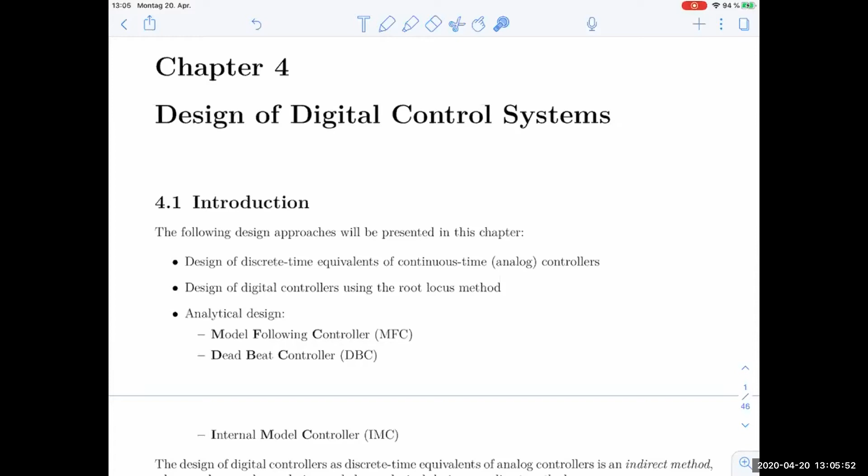Let's go into the root locus method once again. As a short reminder, the first task we have to do is basically look at our control system and decide on a sampling frequency.

We can do that by looking at, on one hand, Shannon. The Shannon principle, or the Shannon theorem, tells us that whenever we have some highest frequencies active in our system, in our signals, we choose our sampling time less than half times one over this frequency that occurs in the system or signal somewhere, which is a too weak bound usually.

We should definitely sample faster, because usually we do not have the idealistic framework of Shannon valid. When you look at typical responses, you see up here a non-oscillatory response like this one, or a typical oscillatory response. You can identify time constants, as you know, from PT1 behavior, or in PT2 behavior, the period length of a damped oscillation here.

The rule of thumb that is usually successful is to select the sampling time an order of magnitude faster than that. If you have several of those effects in the system, you have to decide on some trade-off, but you have to resolve the relevant time constants finely enough, with several samples at least. Usually we have 8 or 10 samples, which we consider sufficient.

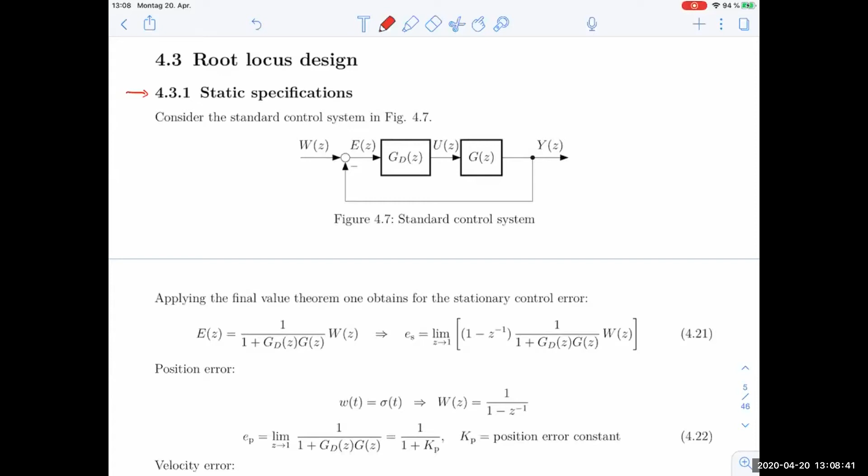Basically, static specifications are, for example, the position error and the velocity error. Here are the formulations for the discrete time control system. You see this control system up here in figure 4.7. So we have a controller in series connection with the plant in its Z domain representation, and a unit feedback, a negative feedback, where W is the reference, E is the control error, and Y is the output, and in between here we have the control input U, the manipulated variable.

The position error is defined as basically the value of the control error E, after we step up in the reference for long times, so for the limit Z towards 1, respectively for the time index towards infinity. So we look at the steady state response when we go in with a step, that's the step representation in the Z domain, and then we just evaluate this limit. The position error is just 1 over 1 plus Kp, and Kp is this stationary gain essentially for the loop gain, Gd times G.

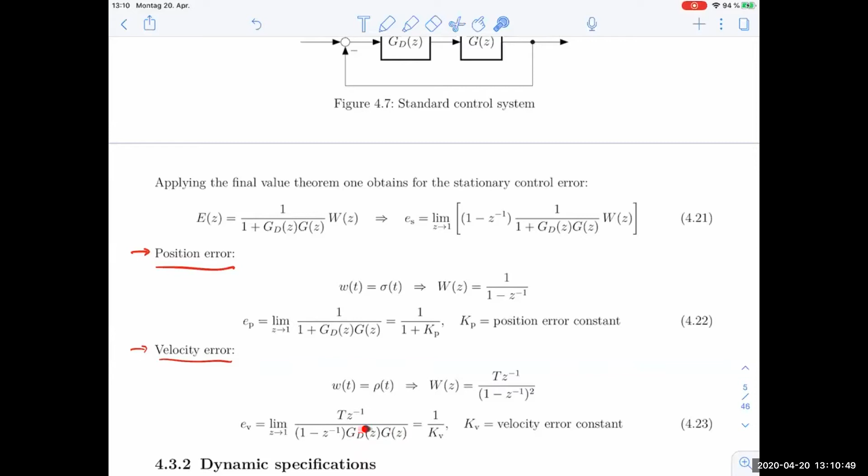We call this Kv, the velocity error constant. And if you have specifications in the position or velocity errors, then you have some idea now how the loop gain should behave in its stationary limit.

That's why we come up with these static specifications. For dynamic specifications, that's what we typically mean when we speak about some rise time, a certain time that the system reacts and is being pulled up to the reference or target value. Then there is some settling process occurring.

Usually you have some overshoot, which we call EM, as a ratio of the maximum amplitude divided by the final amplitude, minus 1. And then you have the time at which this maximum occurs.

Then you have a settling time, after which all the transients have died out sufficiently well so that the output variable is within plus minus some delta bound of the final value. This is typically 2%, plus minus 5%, or whatever you want to use.

These dynamic specifications are basically real world numbers that you can come up with. By that, you can specify how fast the system should follow a reference step or should adjust its behavior once a disturbance hits.

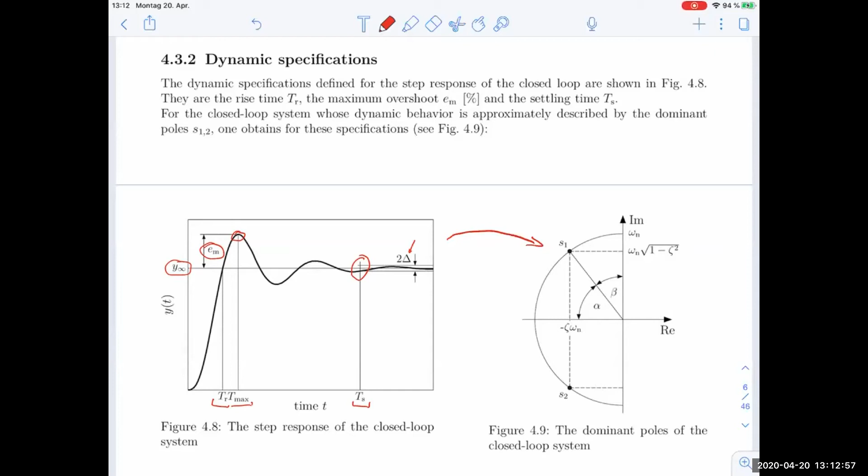If we have these numbers, we can translate them into our well-known S domain and into a pole pair location of a dominant pole pair. So here the dominant pole pair idea comes in, because in the PT2 case we've drawn down these numbers, we have simple formulas.

If we have a second order system which dominates the response, if we have two poles that dominate, and there might be some other higher order dynamics, but they should not be important, then we can approximately treat our system as a PT2 system and specify two complex conjugate poles in S, and of course in the Z domain afterwards.

We just transform them to the locations in the Z domain afterwards. But the step is usually: first you translate these real world specifications in a dynamic setting to the S domain pole locations, and then to the Z domain.

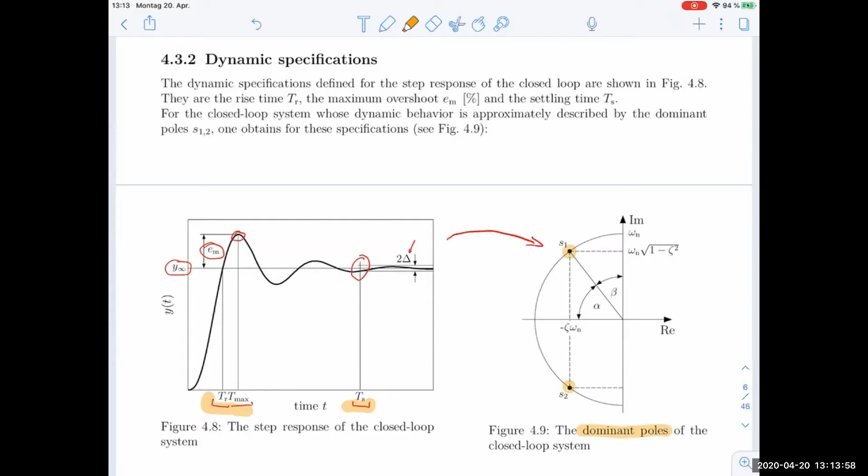So that's how we come up with the specifications to set up our control design if, for example, we want to use the root locus method. We have some formulas collected here for the rise time and the overshoot and so on, and in the collection formula, that's also included, of course.

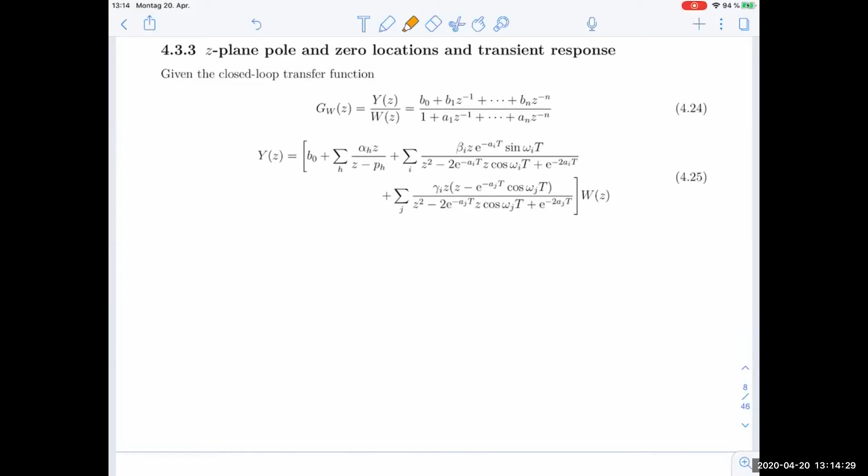Last time we spoke about first and second order system responses. When we look at the Z domain first and second order responses, what we can see is for the first order response, that's basically systems that look like C over Z minus P, which is basically a PT1 behavior.

If we look at its pulse response, the weighting sequence, we can see that depending on where the pole location is, if it's inside the unit circle, then we will get the typical response we are used to, just sampled. For an asymptotically stable PT1, we will have a decaying pulse response, a decaying weighting sequence.

The boundary case, the marginal case, is when this pole tends toward the integrator location at Z equals 1. Then the pulse response is just basically the step: we hit the system with a pulse, and the output jumps up to 1 and stays there. That's marginally stable — it doesn't blow up, but it doesn't decay to 0 either.

The next qualitative case would be to shift this pole outside of the unit circle, and then we have our exponential blow up, going to infinity.

But then we've seen the interesting effect that when we realize a system with the pole on the other side, with a negative real part in the Z plane, we have a very interesting behavior — we call that the ringing behavior, where we essentially have a change of sign in each and every sample.

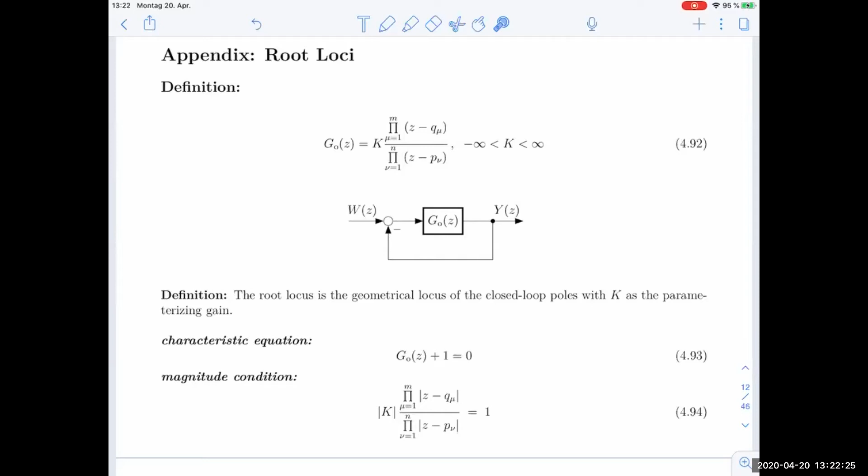If we look at this and want to ensure we solve this equation fully, we can either split it up into real part and imaginary part, a Cartesian form, and ensure both parts of the equality are fulfilled. But we can also take an Eulerian approach.

This Euler way of writing down such a complex equation is advantageous here, because it turns out we can split into the argument, which we call the angle condition, and into the magnitude condition. We have to fulfill both to fulfill the entire equation. When we unwrap the terms, we see distances from the variable z that we enter with, and the zero locations and pole locations of the loop gain, which we know a priori. We can evaluate that, we know our plant, and we can at least write down how the controller should look.

What we want to find is the poles of the closed loop. Where are they? We want to ensure they lie somewhere we want them, which is not an easy task. That's why this method is good, it simplifies this task.

It simplifies it in the following way: the angle condition turns out to be independent of the unknown gain K. K is just the proportional gain, usually attributed to the controller gain, and it only pops up in the magnitude condition, not in the angle condition, except for its sign. That's what we usually decide about, or if unsure, we can look at both signs separately. But we don't need to know the specific value of K to evaluate the angle condition.

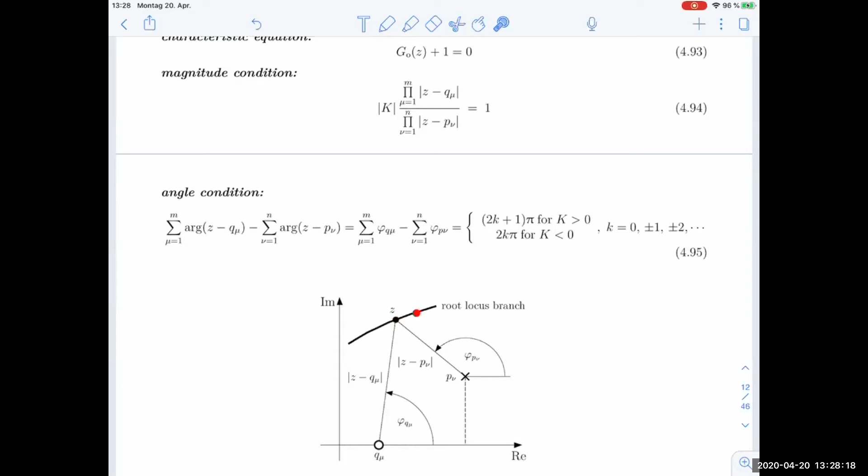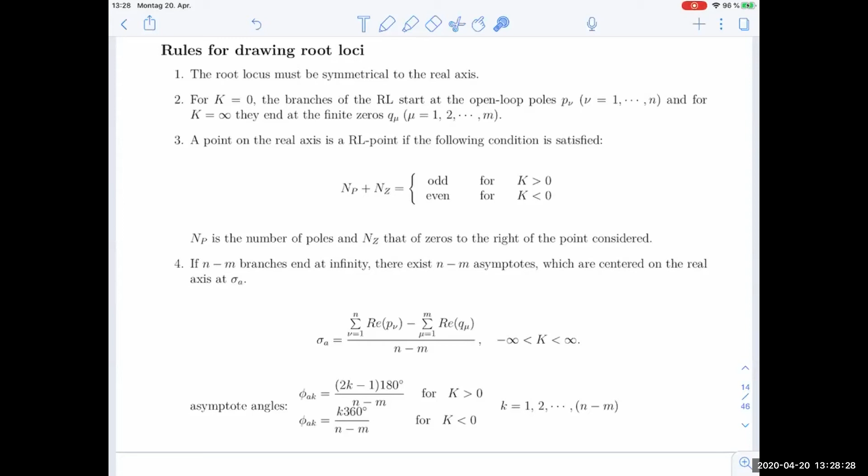We also collected some rules for drawing those root loci, these root locus curves. I will not go through them with you now, but we will talk about these rules again when we look into the examples afterwards.

MATLAB, of course, supports drawing root locus curves and doing root locus design with two different tools. I'll just write them down quickly here. In MATLAB you have rlocus, to draw the root locus, and rltool, which is an interactive tool to design root locus controllers. You can try them out, of course. This interactive tool has a nice help, so you can just play around with it. I will jump to these rules when we need them.

Essentially, let's go into an example. That's where we stopped last time. So we will look at this structure here of the feedback system, the control system. We have the controller, then we have the plant, and we'll get some particular plant here. Actually that's already G0, that's already the loop gain.

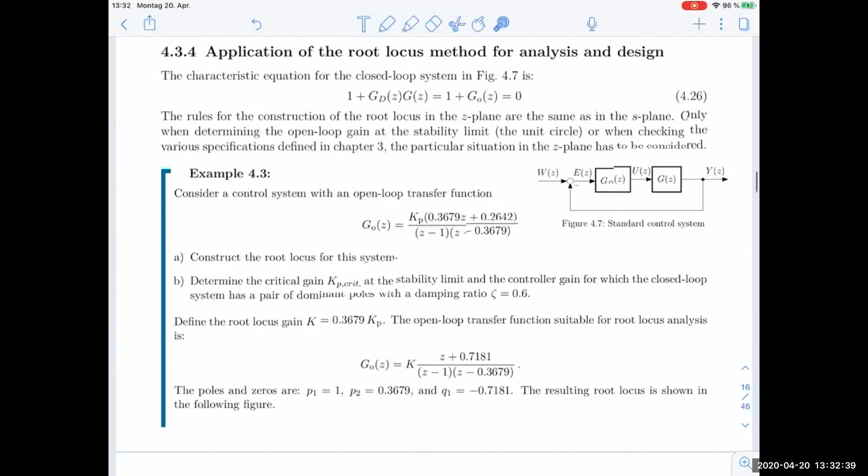Now, the first thing I said is that we draw basically the closed loop, the loop gain pole and zero configuration. So what we'll do now is exactly that. I will draw a pole here at 1, which is P1.

Then I have a pole at 0.37, roughly 0.4, that's somewhere here, P2. And then we have Q1, which is at minus 0.72, somewhere here, let's say. I want to draw the zeros with this ring.

Now, what we know from looking at the characteristic equation, let's think about that a bit. We have the loop gain GO of Z.

Let's say we write that as B of Z divided by A of Z. And we have our characteristic equation, GO of Z plus 1 equals 0. We can write that as B of Z divided by A of Z plus 1. Now we can multiply that by A of Z, so we get B of Z plus A of Z equals 0. That's just a different way of writing down this characteristic equation, rewriting it from a fractional form into a polynomial form.

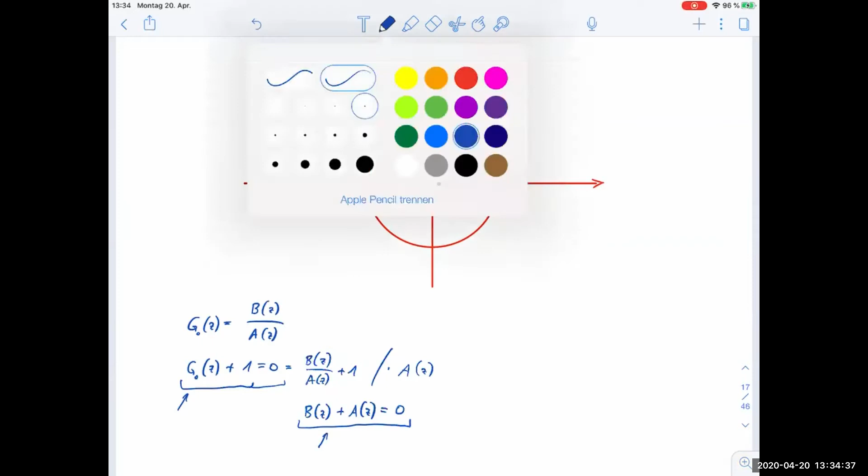Now what you can see is the following. Let's say we write down the gain k here in front of GO. Then this gain ends up in the numerator here, and also in the numerator polynomial B. Now if you look at this, the equality is fulfilled for closed loop poles z. So if z is a location of a closed loop pole, then this equality is fulfilled.

Now if we set k to 0, you're looking at the pole locations of the open loop. That's clear because k equals 0 means we just opened up the feedback loop, and whatever poles have been in the system in open loop are still in the system in closed loop. So from this equality we get A of Z equals 0, which is the characteristic equation of the loop gain itself, without closing the loop.

So that means for k equals 0, our closed loop poles are actually at the locations where the open loop poles are. Now if we increase k, that becomes some complicated function, which will actually be characterized afterwards by the root locus curves.

But for the limit of k towards infinity, the term A will become less and less important to contribute here. So something very large times B is approximately equal to 0. Essentially for k towards infinity, this equality tells us that B of Z equals 0.

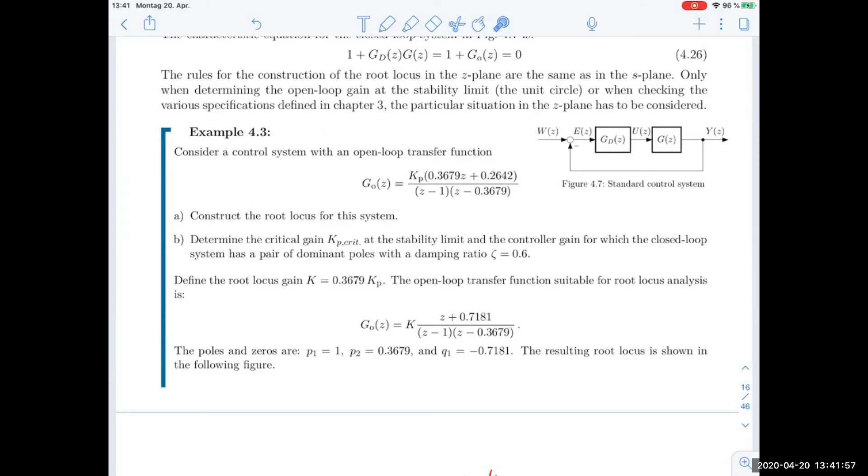And then basically we read off the value k itself in our standard notation, which is 0.88 here for the critical case, or 0.15 for this case for zeta equals 0.6. And then we have to translate that back. Remember, we had this factor of 0.37 or something in between. This equation here connects k and kp in our case. So let's look down again. That's how we get to this critical kp value and the kp value which achieves a damping of 0.6.

All right, so that's how we can interpret these root locus curves. And it's essentially looking at the parameterized figure or illustration of where the closed loop poles go when you change the gain of your controller, for example, of the loop gain in the end.

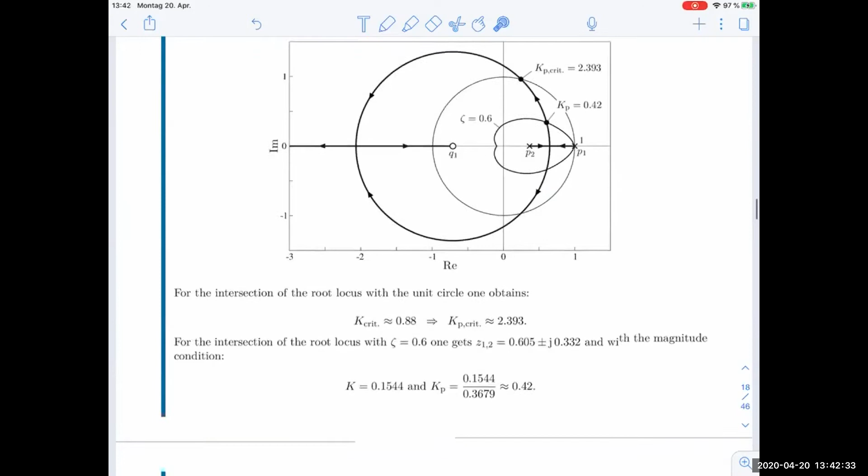All right, let's go to the next example, 4.4. So we have a transfer function. Let's start here in the S domain. That's the transfer function of the plant. We have 30 over S plus 2 times S plus 5. And now we want to design a discrete time PI controller to fulfill some specifications. So we want to have a zeta of 0.5 of the dominant pair of poles.

Now we have to be careful because we will have two poles from the system here, and we will have an integrator from the PI controller. So we'll have a total of 3 poles, and we have to make sure that we look at the dominant pair of poles. Essentially, the third pole location will have to be fast enough.

Also, we choose the sampling frequency as 10 times the damped eigenfrequency, and the sampling time we choose as 0.25 seconds, so a quarter second.

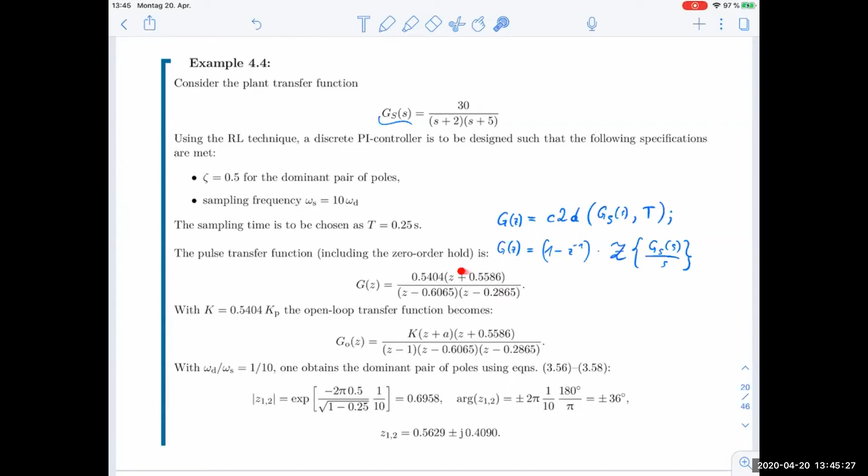And of course, we have our formula somewhere up there, which is 1 minus z to the minus 1 times the z transform of G(s) of s divided by s. That was this boxed equation somewhere two chapters back. Okay, we get to this formulation for g of z. So we see that we have one zero here. That's just the plant. We'll still add the controller, and we have 2 poles of the plant.

Now we see again that we can extract this factor here and rewrite the system with some k. Here is the correspondence: k, then we have a real zero in the PI controller, z plus a. A is unknown as of now. Then this comes from the plant, and we have the integrator pole, and again the poles of the plant.

Okay, now let's work on our specifications. We have a specification up here, zeta equals 0.5, and we have a relationship between the damped eigenfrequency of the closed loop system of the dominant pair of poles and the sampling frequency. So basically now, as we have the sampling frequency determined by a quarter second, we can come up with omega d and directly go into the formulas.

Here we have the formulas which tell us where the poles are. So that's the absolute value of the poles, 0.7. It's inside the unit circle, of course. And the argument is plus minus 36 degrees from the origin in the z-plane. By using tangents, sine, cosine, we get to the Cartesian notation.

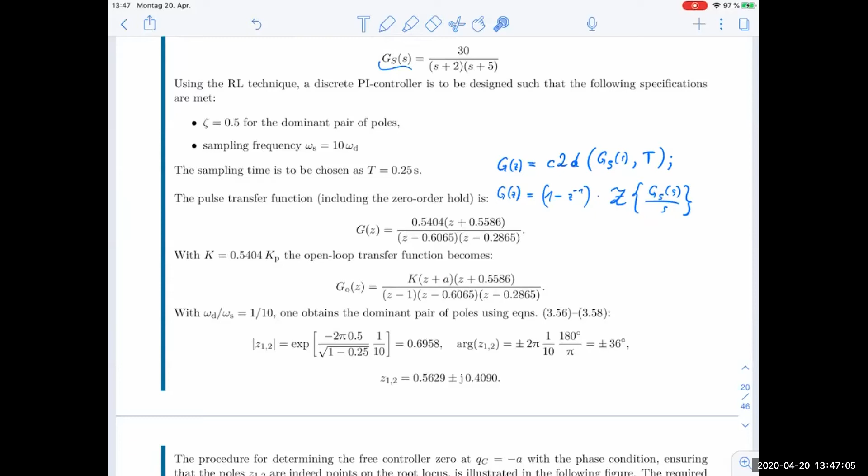So we know where the poles should be. Now, one difficulty is that we have the unknown zero location in the controller. We could start our control design as we did earlier by just choosing some of the stable poles and putting the zero of the controller there in the hope that they will cancel out and simplify the task. But it can be that we cannot fulfill our set of specifications with that. So we will choose A in some very elegant way with the root locus method.

And that works as follows: we use the phase condition to determine A directly, or quite directly. Let's see how we do that.

First of all, in this figure, you see the configuration of the poles in the open loop gain. So we have this pole, the integrator, and then we have 2 poles here of our plant. Let's quickly have a look where these poles are. They are written down somewhere up there. Here we have them, here are the poles. Let's just write them out.

So we have P, let's get the numbering right. PC for the controller pole is at 1. Then we have P1, that's at 0.6065, and P2, that's at 0.2865. If we insert either of these poles into the denominator polynomial, you zero out the polynomial. So those are the poles directly of the loop gain.

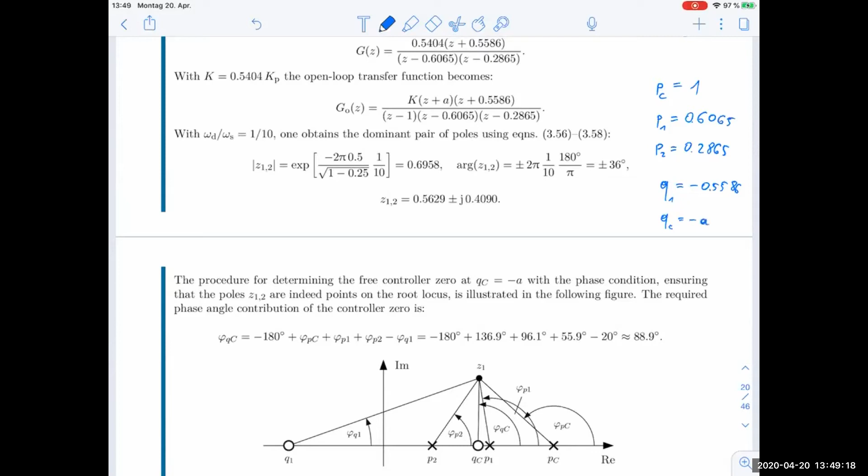Also, we have Q1, we know it's at minus 0.5586, that's from up here. And then we have another one, the controller zero location, QC, at minus A. Careful, it's a minus A here.

Now we draw the configuration. We put in here in a sketch which actually has the right distances. So this one is at z equals 1. And we draw those. What we don't know yet is, of course, where the controller zero is, so we can draw it anywhere.

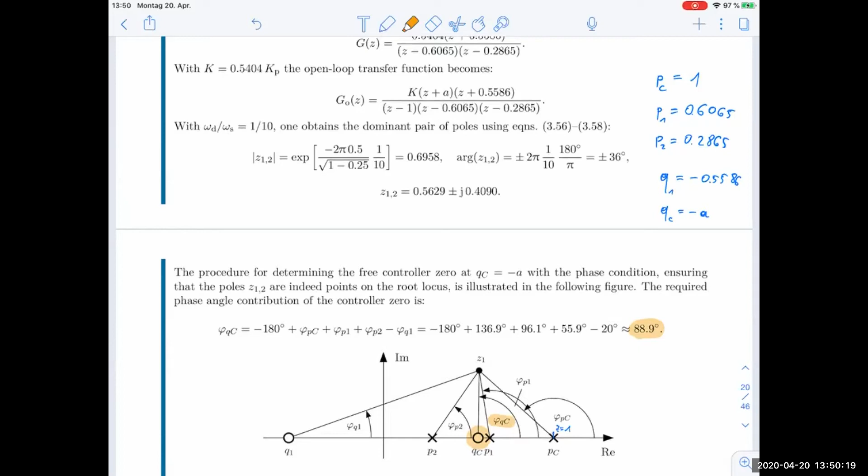This controller zero, it's anywhere, but what we'll do now is evaluate the phase condition, and by that we can reformulate it directly to phi QC, the angle spanned through the zero of the controller. By knowing this angle, which we insert, is almost 90 degrees, a little bit less than 90 degrees, we see that this zero actually is almost beneath Z1 here, and we can come up with the actual value of 0.555.

And we did not need to look at K, other than assuming K is positive here. That was done implicitly for K greater than 0. And that's why we have this minus 180 degrees here, which comes from the right-hand side of the phase condition. We'll get all the other angles added in here with the corresponding signs.

Here we evaluate it in degrees, and we get phi QC, this almost 90 degrees, and we didn't need to use the value of K. Now we go on, and we can determine the value of K by evaluating the magnitude condition.

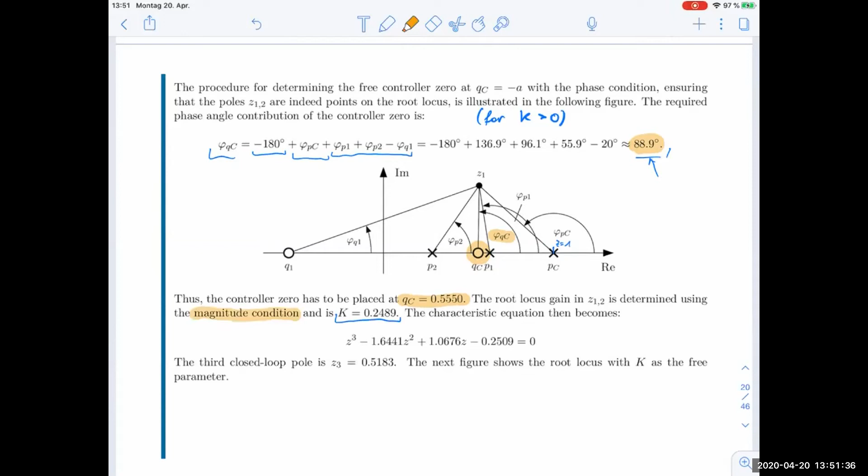With this magnitude condition, it's fairly simple. We just come up with the distances here. Essentially, what you need is to measure these distances from each pole to each zero, and of course also now from the newly found one. It's not exact what I draw here, but you get the point. These red lines, the distances, are the quantities that you need to insert into the magnitude condition and reformulate correspondingly, and you obtain K.

Okay, now we actually did everything. The only thing left is to check whether we have a dominant pole pair. We write out the characteristic equation, this third order polynomial, all numbers now. We already know two poles. That's what we ensured already. So we can divide by these two poles, and we get as a remainder z3 equals 0.52. It turns out the absolute value is significantly less than the absolute value of the other pole pair, and by that we can say it's basically a dominant pole pair here.

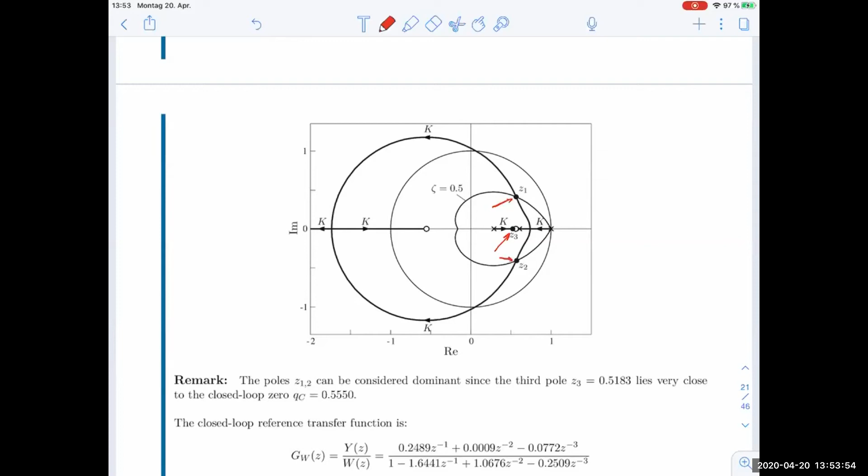If we look at the root locus plot, it looks like this. Essentially we'll get these rounded dots as the specific locations of our closed loop poles. So we have these 3 poles in the closed loop with our choice of k, k equals roughly 0.25. We see that 2 of the poles end up at the curve zeta equals 0.5, so we have this particular damping. Then we have a real pole, which is faster, and that's fine for us.

Of course, it's only approximately dominant. It's not that this 3rd pole doesn't have any effect at all, so it's not exactly the response of a PT2 with these pole locations. But again, we can just simulate and check if we're close enough.

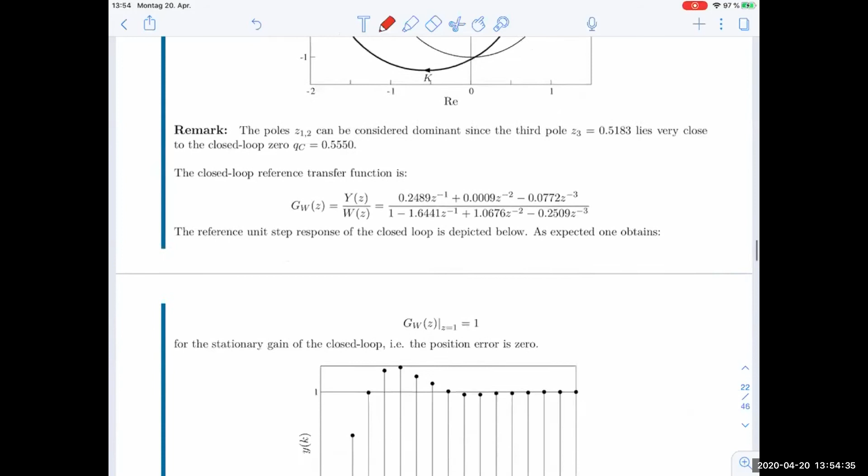Let's do that here. We look at the closed loop transfer function, the reference transfer function, and the step response. We see some particular overshoot. Visually it's more overshoot than before, but before we had a higher damping in the other example. In this example, we have a damping of only 0.5, so a higher overshoot is expected. But also here, it's essentially what we expect with these specifications.

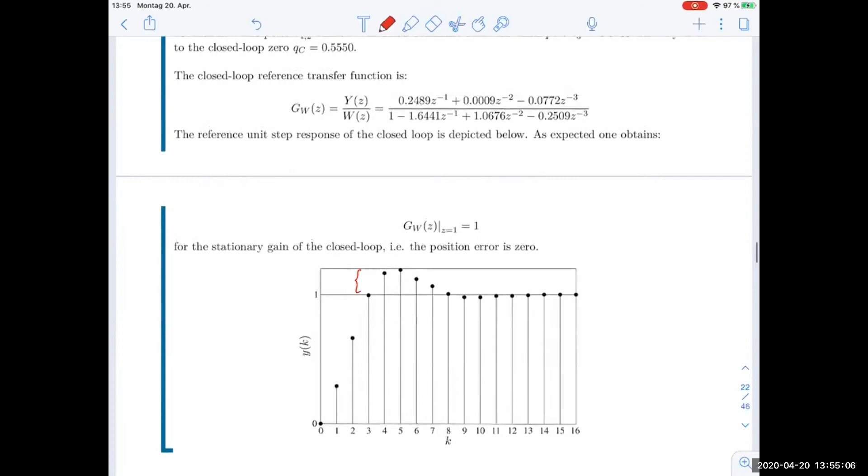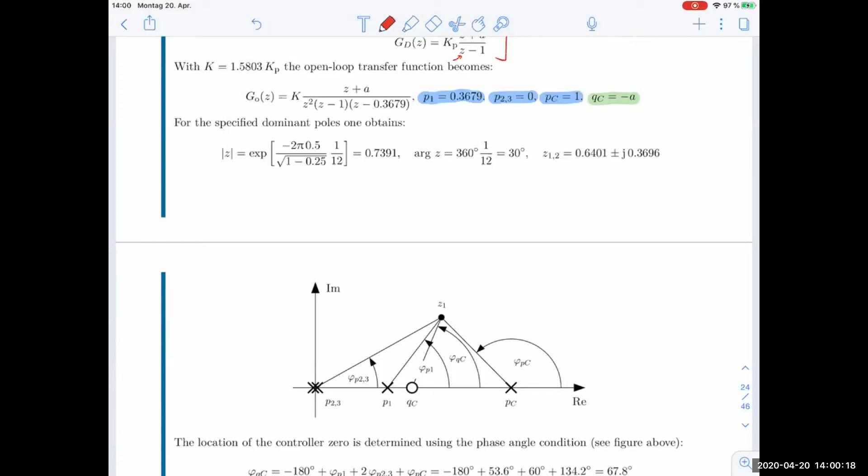So using the Cartesian writing, we get this location of the poles of the closed loop. Let me just clarify that in this sketch. I'll take one color for open loop values - let's take open loop poles in blue. Then I take green for the open loop zero, and orange for the closed loop locations. So the closed loop is Z, that's what we want to end up with.

And for the open loop locations, we said our poles are in blue, and the zero here is also unknown as of now, but again we will use the angle condition, the phase condition, in order to directly get the value of this angle, phi QC, to fulfill the angle condition. So that's the formula for it.

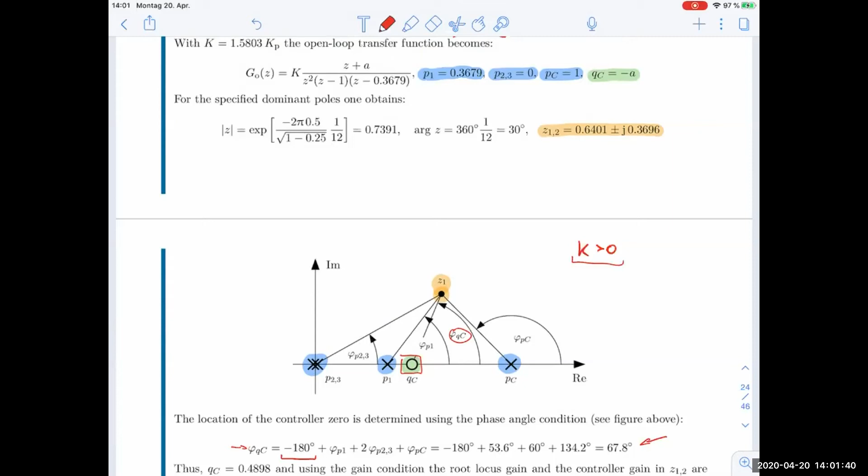Again, we look at k greater than or equal to, or k greater than 0, and that determines basically if we have a shift of 180 degrees in the phase angle condition. So we can reformulate the phase angle condition to express phi QC directly. It's roughly 68 degrees, and from that we can actually establish where this zero should be. That's the first step, and in this step we didn't need anything apart from knowing that k should be positive and the other known poles and zeros.

Okay, once we've done that, we know now that in green, our QC is determined as roughly 0.5. And now we use the gain condition to come up with the values of K, respectively Kp, to really realize the pole here at the specific location that fulfills our requirements, our specifications.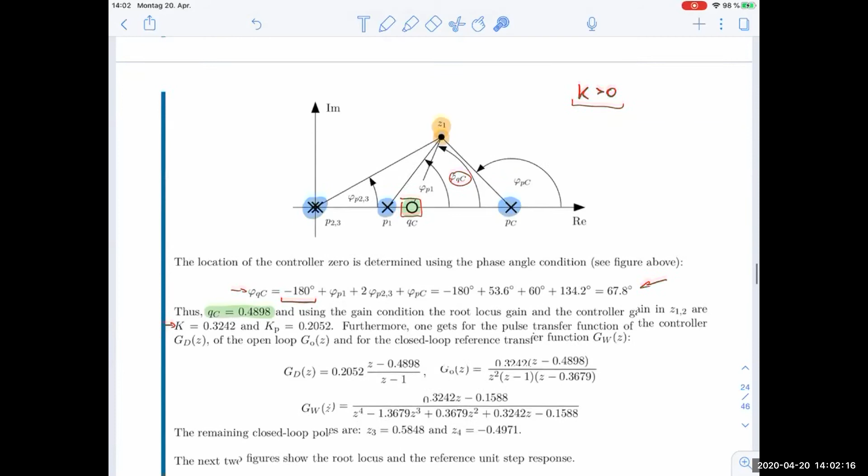Then we formulate the closed loop transfer function, which is GW here for example. Of course, as an intermediate result, we'll directly insert into the controller transfer function. So that's the controller that we need, that we designed now. That's the main result, and now we analyze the closed loop response.

We see that we have many poles here in the closed loop. We have 4 poles, and we have to make sure that all these 4 poles, or 2 of those 4 poles, are at our specified location, which is true if we've done the design correctly up until now. But we also have to make sure that the other poles do not interfere and leave the pole pair that we designed for dominant.

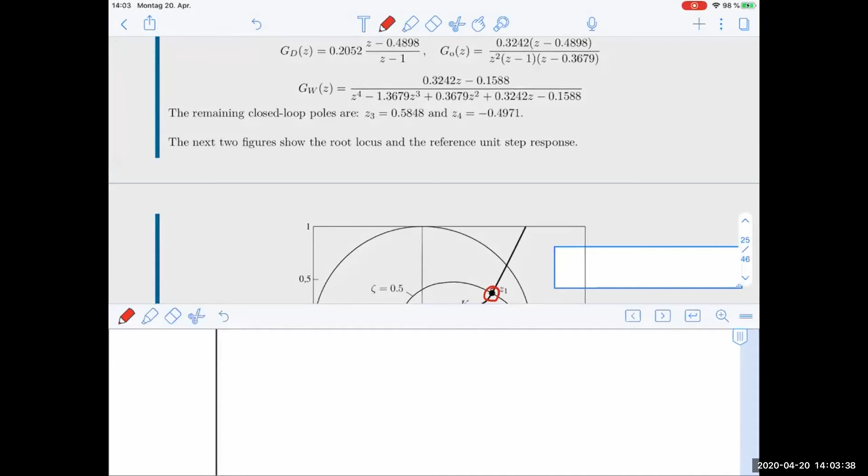Let's have a look. So essentially what we see here is that these poles are the ones that we designed for, in terms of a dominant assumption - that we assume this pole pair dominates the response. And then we have 2 other poles here and here. The question is now, we can take them back into the S domain and judge about them where they are.

But the more poles you get, the more you actually have to see in a validation whether you are close enough to your PT2 idealization. So in the end, we'll have to come up with a simulation like here. And we look at the step response.

Of course, we have 2 samples dead time - that was what we modeled already in the plant. And then we have the response, and actually this response also looks qualitatively very nice, like what we would expect from a PT2 with the specifications. You can always plot the corresponding PT2 and directly compare how the perfect PT2 would actually be behaving. In that sense, the design can be considered successful.

All right, so that was a quick tour through some control designs with the root locus method. Essentially, what you should have as a takeaway message is the root locus method is a structured tool in order to look at the closed loop pole locations, which is essentially the difficult thing that we solve for in a very elegant way.

And we can see how the system reacts when we change the gain of the system, where the poles will slide. That's actually why you would use root locus methods, because you get some more idea of how the system behaves, how sensitive it is. In the other course, the feedback control course, we have some more examples and ways to apply this method.

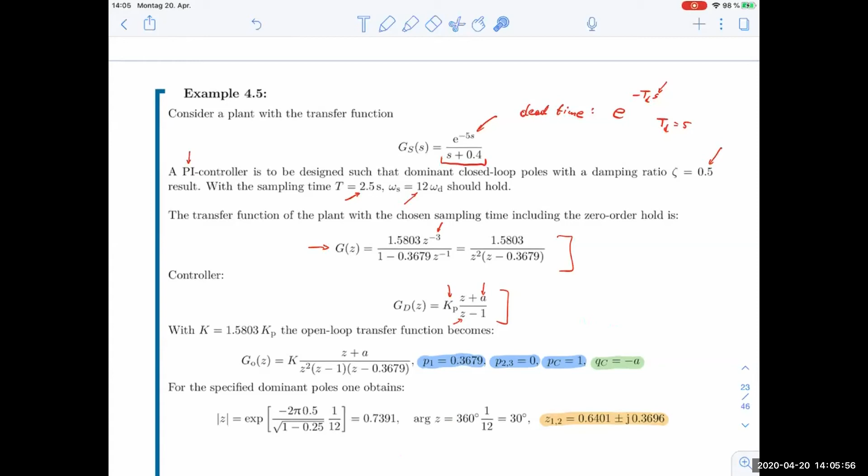For example, for sensitivity analysis, when we ask ourselves: let's say our plant pole is from some data sheet, but maybe this pole actually changes afterwards and the system becomes slower or faster over time because of aging, accumulating dirt, friction, damage, whatever. Then you can rewrite this root locus method to assess how far this change of time constants can go until you're unstable, which is a very interesting way of approaching sensitivity and robustness.

All right, we don't do that now here. We will flip to the next control design method. But just as a teaser, if you want to know more about the root locus design method in detail, go to the other course, the feedback control course. There we treat that in some more detail with examples. And of course, in MATLAB you have plenty of tools. The root locus tool is interactive and allows you to shape simple control designs for relatively simple plants. It's a very useful method to play around with.

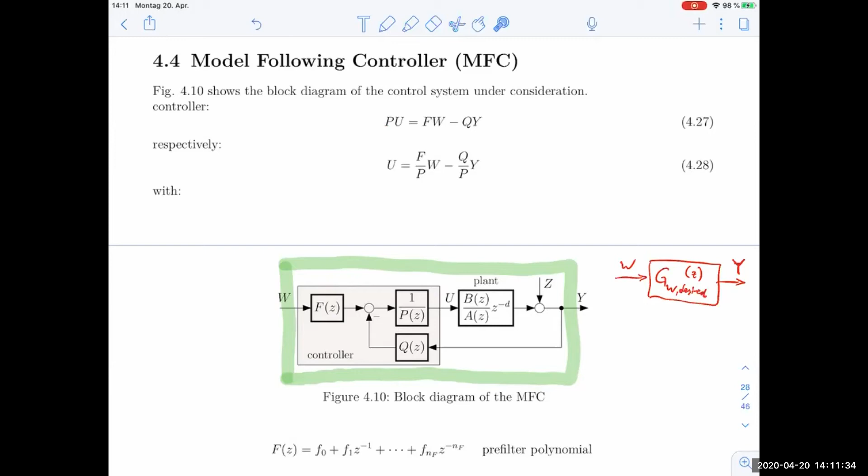Let's just start out by writing down - remember that the block diagram is just a graphical expression of equations, so we just write out these equations. That leads to the equations we see here: P times U, so basically you can write U equals 1 over P times (WF minus QY). Okay, so that leads to this form here. If you multiply by P, then yeah, that was actually exactly 4.28, respectively this one, when you reformulate it.

And we specify that we have polynomials f, p, and q. We just decide for some notation here.

So we decide for negative powers of z everywhere. And we write down f of z as f0 plus f1 z to the -1 and so on until some order, which we don't know yet, but we just write it down as an ansatz, fnf as a coefficient times z to the -nf. And we call that the pre-filter or the pre-filter polynomial.

Then we have a feedback polynomial q of z. We write it down in basically the same fashion with unknown coefficients here.

And then we have this polynomial here, the feed-forward polynomial p of z. And we decide here for a particular structure, we set this first coefficient to identically equal 1. So this polynomial is called a monic polynomial if it looks like that. And then we go to some order with negative powers of z. All these coefficients are unknown in the beginning, and we will find a bunch of formulas to determine all these coefficients afterwards.

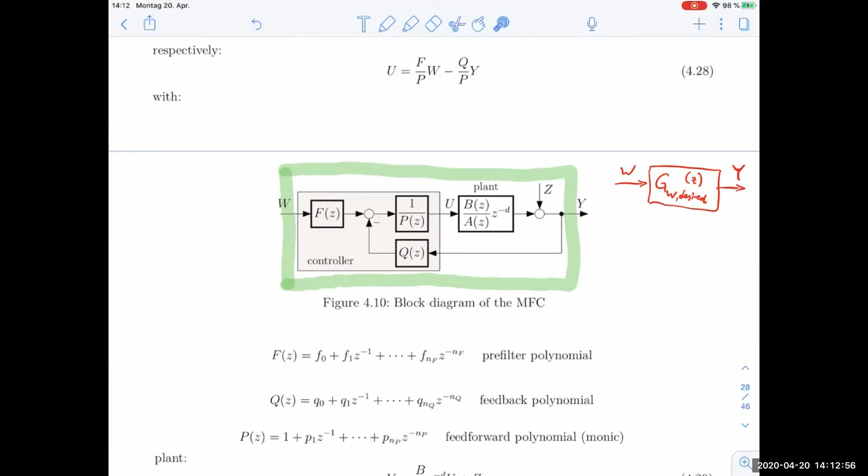Now, if we take the plant transfer function given like this expression, y is explained. You see that here z is added to the output of the plant to get to our measured output. So that's just how we model the disturbance here. So z plus b over a, that's also polynomials, times a dead time term, maybe z to the -d, times u.

And a and b are also written down in this negative powers of z form. And a is also defined to be a monic polynomial, so this leading coefficient here is 1. And of course, the remaining coefficients, if we have some scaling, then that ends up in the B polynomials. But we can always get to a form where A is a monic polynomial with this leading one coefficient.

Also, what we have is that B of z is always of lower order, in the sense that if we write it in positive powers, it's of lower order than A. So if we rewrite it in negative powers, we'll see that B0 here is always dropping away. So we start out here with B1 times z to the minus 1, and so on.

Okay, that's all notation up until now. Now let's do the interesting derivation, actually. So what we do now is we write down the closed loop transfer functions.

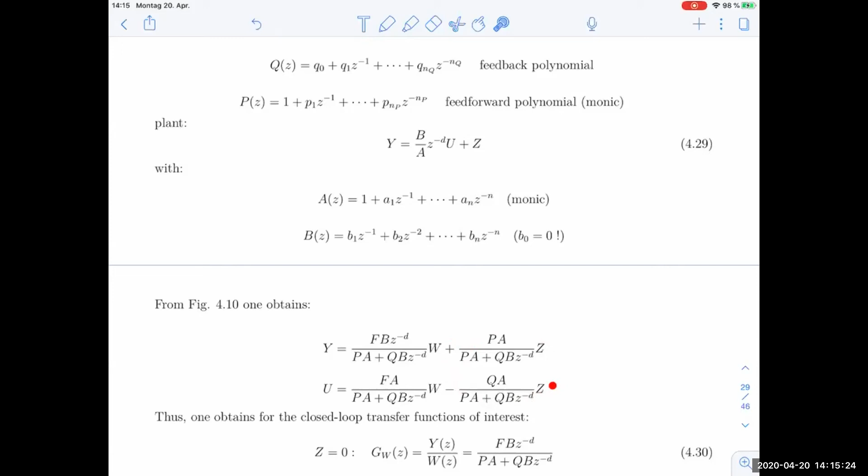Now we'll set z to zero for the sake of the reference design, so we forget about the disturbance for a moment. And by doing that, we get the reference transfer function here, which is just this term - some polynomials multiplied in the numerator and then some polynomials multiplied in the denominator. That's all polynomial multiplications. So that's actually what makes things difficult here, because we have some polynomial b and some polynomial f. F is entirely unknown and they are multiplied together.

So it's not so easy to actually solve for this polynomial f directly. And also we get polynomial p and q and they add up here. So it gets a bit messy and we have to organize how we actually solve this.

In the end, what we want is actually that this GW should be equal to some GW desired. And then we have to fetch out the corresponding values of F, P, and Q coefficients. And that's our control design. So that's what we want to do now.

That's the model following control design, it's actually called. Okay, now how can we do that?

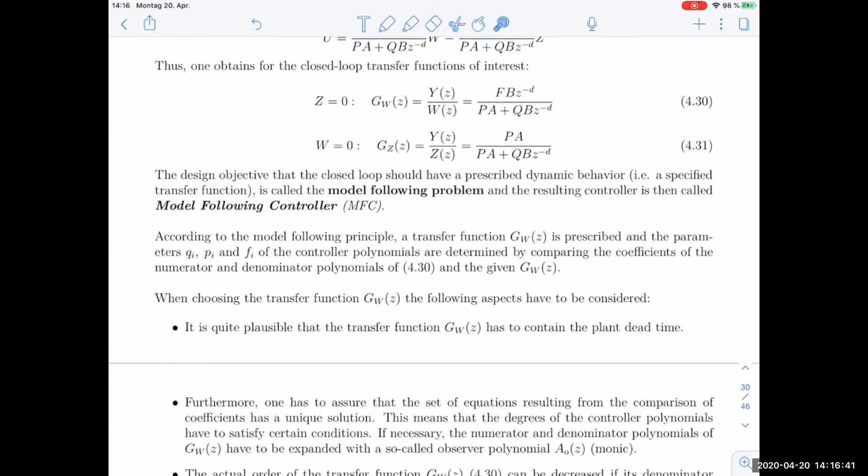First of all, we cannot choose any GW desired to be realized by such a structure, but we have to make some adjustments, or take care of which GW desired we want to choose. We see that in the closed loop, the dead time term comes up in the numerator, so we can pull that out. It's quite plausible that we will not be able to cancel that out.

So the dead time has to stay there, that the plant inserts or introduces. The next step is that we have to be able to solve the corresponding equation. So if this should be equal to GW desired, we have to solve uniquely so that we get a comparison of coefficients essentially. We have to have a sufficiently high order in the numerator and denominator to make all these coefficients fit successfully.

To our desired GW terms, and to do that, we will introduce an additional degree of freedom. We introduce a so-called observer polynomial, AO, which we take as a monic polynomial again, of a certain order. We'll see what this order has to be afterwards, but we will expand essentially both sides of the desired polynomials to accommodate sufficient order that we need to have this correspondence.

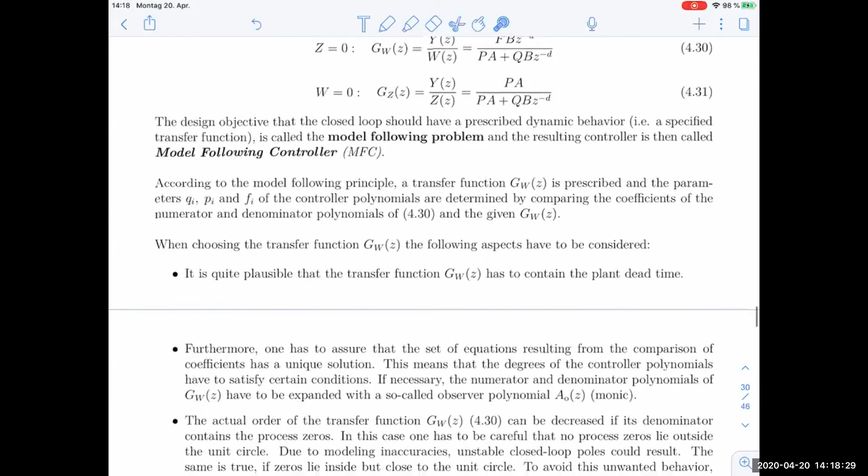Okay, now if we have in GW, if GW actually contains process zeros already in its denominator, then the order actually decreases. So we will do that in the following form.

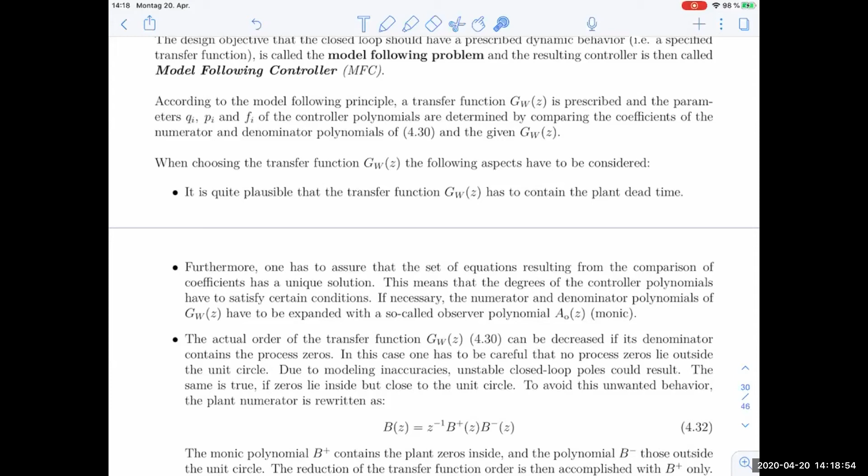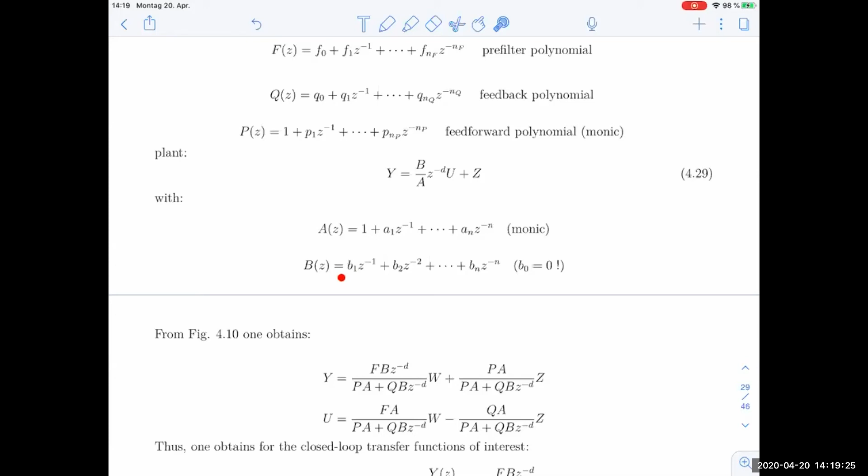The process zeros can be written down like so. We can write down the numerator polynomial here. We always have a leading factor of z to the -1. Remember, we've said the numerator polynomial of the plant should look something like this. So we have b0 equals 0, that's gone here, and the first term is b1 times z to the -1.

So we can always write down b of z as z to the -1 times something else. And then these two polynomials here, we can factor them and collect them into groups. B plus is what we actually want to exploit and cancel. That should be those zeros of the plant that can be cancelled. And if you remember our discussions earlier, that can be only zeros if they are cancelled with poles which are inside the unit circle, which correspond to stable dynamics in terms of pole locations.

So we will take into B+ the plant zeros that lie inside the unit circle, and in B-, those that lie outside, or just the remaining factors that we need. Those will just remain in the end. And if you go down here, when we put that all together, we have GW, which is BW over AW times z to the -d. We said that we need to have the dead time still in there.

Now let's look at this term directly here. This term contains now our structure that we derived above. F times B, all this here is B, times z to the -d. And down here we have something split up of P times A plus Q times B times z to the -d. So that's this term here comes from our structure of the controller.

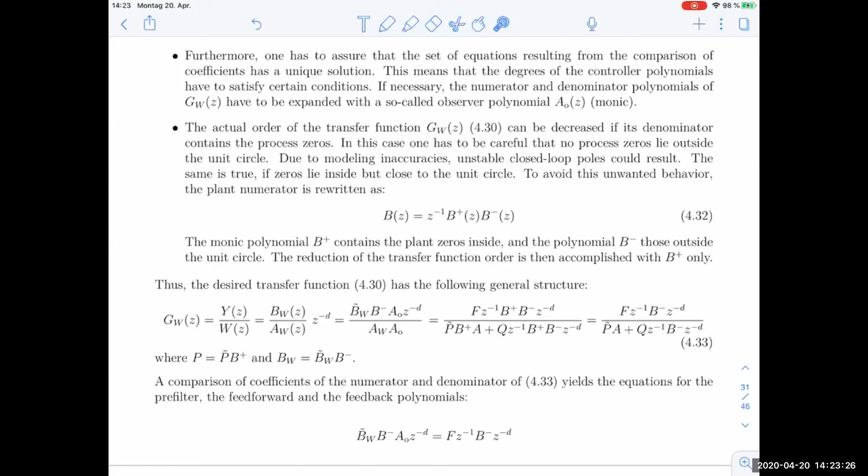So essentially what we do is now we do this comparison of coefficients between this fraction and this fraction. And the first one, the numerator, is actually simple. The numerator terms are aligned, and given that we choose AO somehow, we know BW tilde from GW actually. We know B minus, of course. We know the dead time. The only thing we don't know is F.

And if we just reformulate this term here, Z to the minus D is on both sides, we can kick that out. Let's just do that, so that goes away. And B minus is in both terms, that goes away as well. So we just have a factor of Z to the minus 1, we just multiply that by Z, and we end up with a simple formula for F, for the pre-filter polynomial, which is just Z times known values, and AO is also considered known. We just choose that in the design at some point.

Well, the numerator is easy, but the denominator is not as easy. We just take these two polynomials here, AW, AO, and the form that we got from our control structure here. And we'll come up with a method now to solve this equation, because what you see here is actually we have unknown coefficients in P tilde and in Q as well, and they are added together. That's convolutions here, that's multiplications of polynomials here and here as well.

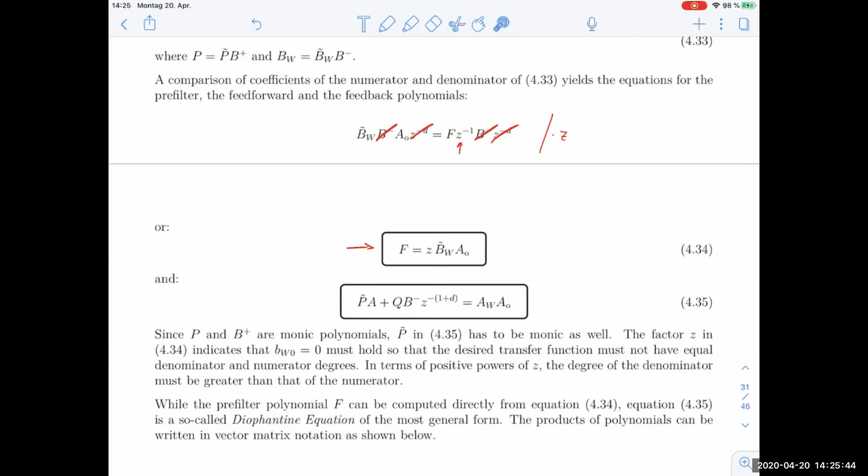And so all these terms at each power of Z, they mix between P tilde and Q coefficients. And let's say on the right hand side, we can do the multiplication for each power in Z. But again, we have a combination here of polynomial coefficients, and that's not easy to solve. In fact, that's a form of the so-called Diophantine equation. And we will show you now a short method of how to solve such equations in this form.

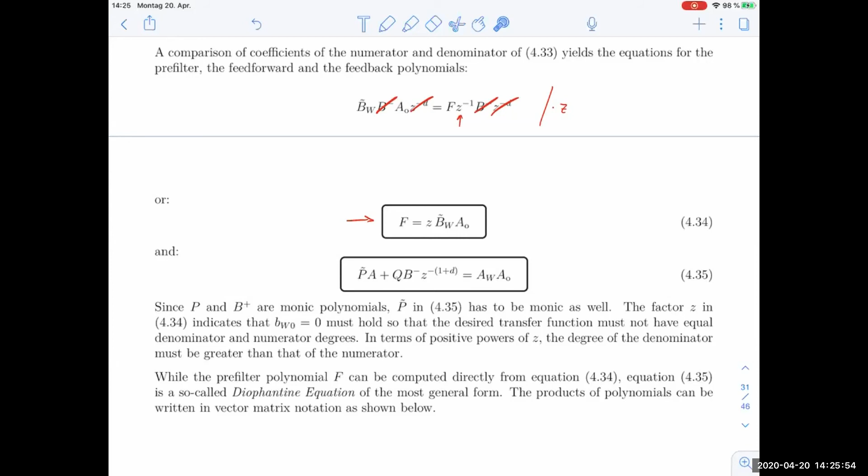Let's do that. We start by basically writing down the products in a clever form. This product here, this product, and also this product are of course again polynomials. And we write down a vector form now basically, where row-wise we will sort out, or connect each row to a particular power in Z. So let's see how that looks like for P tilde times A, and that's both polynomials.

Now, if you multiply a polynomial, let's do that here. We have, for example, A was a monic polynomial, so we have A of Z to the minus 1 times P tilde of Z to the minus 1. That's basically 1 plus A1 Z to the minus 1 plus, and so on, plus An Z to the minus n, times P0 tilde plus P1 tilde Z to the minus 1 plus, and so on, plus Pn tilde times Z to the minus n.

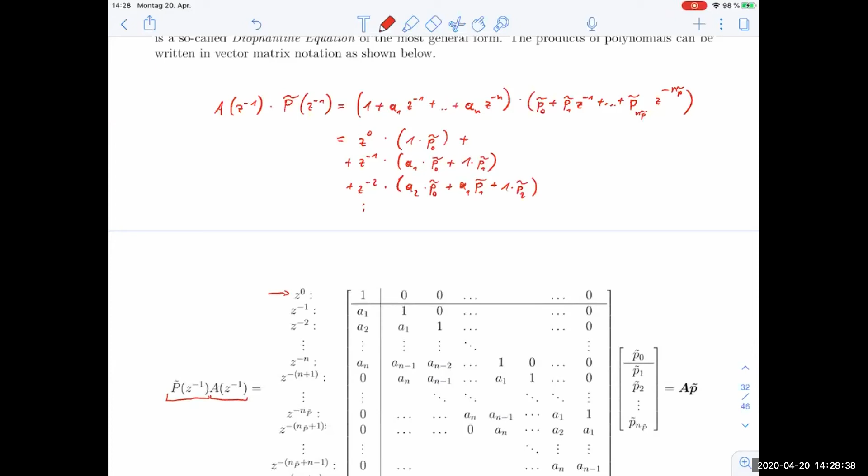And now we write down this product here, and we collect it into a form where we have all the unknowns written out to the right as a vector, which are the coefficients now, p0 tilde until pn tilde. And we multiply that by a matrix. Here we call this matrix capital A.

This matrix is composed so that as a result of this product, we get a vector where all these coefficients are lined up beneath each other. In the first line, we have z to the power of 0, and 1 times p0 tilde - that's exactly what we just did by hand. For the next term, z to the minus 1, we get a1 times p0 tilde

plus 1 times p1 tilde, and so on. If you do that systematically, you get this structure written down here. It's a certain form - actually a Toeplitz matrix, I think, or Hankel, I always mistake those two. But basically you get a certain diagonal structure, and we do that for the other pair as well. We get q, z to the minus 1, times b minus, z to the minus 1.

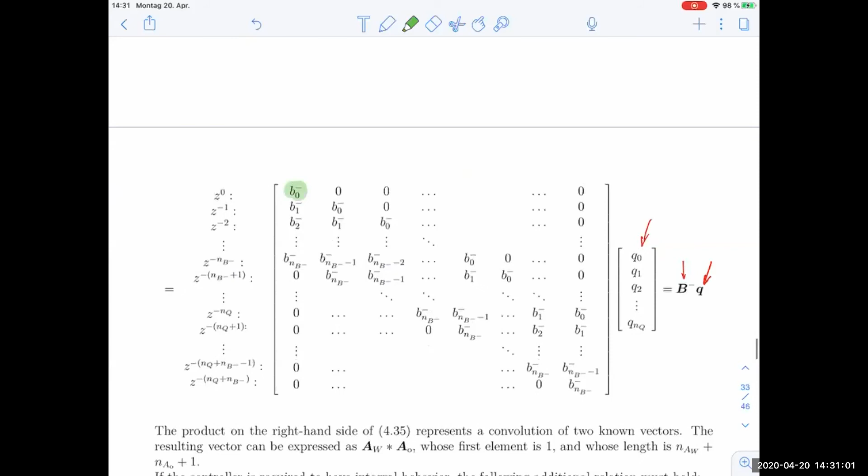Q is unknown, or the coefficients of q are unknown, and the coefficients of b minus are considered known - we will know them afterwards. So what we do here now is again the same. We get to a form where the q vector contains all the unknown q coefficients, and the b minus matrix contains the correctly aligned b minus coefficients. So that's the same story as above. The only difference is that we don't have a 1 here, but instead b0 minus. B0 minus is non-zero, there is some value in it, because it's numbered differently - it's the b minus polynomial, not the b polynomial.

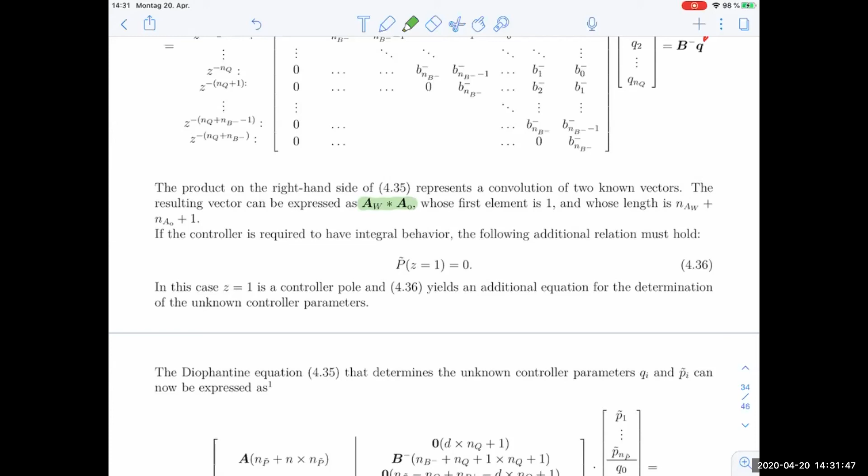Okay, now once we've done that, on the right-hand side, what we wanted to do is we started writing down this first term here, then the second term here. We have to shift that afterwards correctly. And now what we still need to do is this coefficient convolution, this product of polynomials here, AW, AO. By doing that in the same fashion, we express that in shorthand form - it's known, both of them are known, so we just do the convolution. Essentially it's the same as we did above when we did the multiplication and collected for alike powers in z, and then we correctly align that and get this vector.

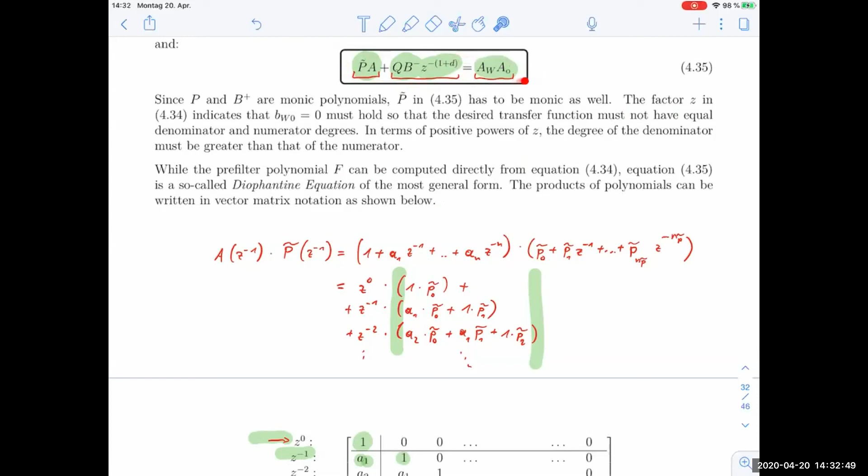Now we can actually reproduce this equation we got up there as a vector equation. This equation here is a polynomial equation as we wrote it down in 4.35. But now we restyled it, transformed it, and write down a system - it's a vector equation now with this term and the next and the next. If all these vector equations are fulfilled, that means all the coefficient relations for the particular z powers are fulfilled, so the polynomial equation up here is fulfilled. So we substitute - we go from one particular form, this Diophantine equation, and unroll that into many vector equations and attempt to solve them. By doing so, we establish the solution for the original problem.

One more thing we can split off - you may have noted that here we have a separation line, and P0 tilde is in fact equal to 1, we already knew that. That's why we have this separating line here. So we can exploit that and insert P0 tilde equals 1, and that's what is done here.

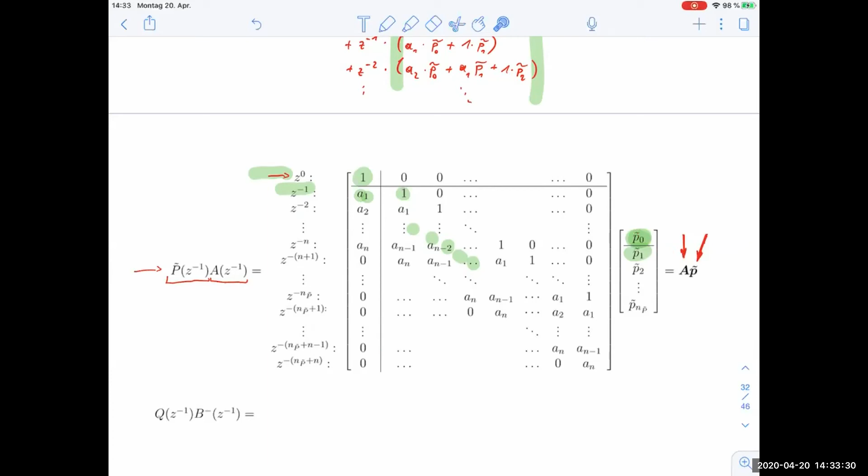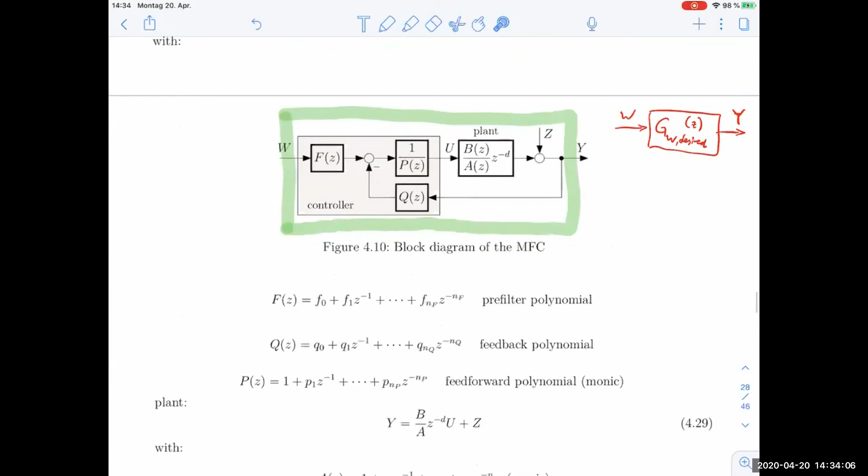Right, and then additionally, if the controller now is required to have integral behavior, then what we know is that P tilde at z equals 1 has to be 0. That's essentially when you look at the controller transfer function - look at that here, the controller transfer function is divided by P. Okay, and now if this controller should contain an integrator, then essentially this P polynomial should have a root at z equals 1. That's just the integrator pole that we would have to add in.

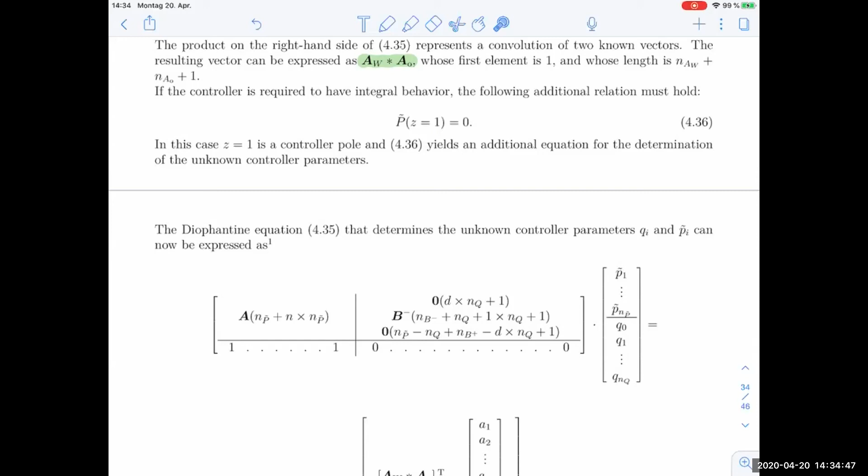And if you write it down - it's a nice finger exercise if you want to do that, maybe in the exercise you will see that as well - this means that P tilde coefficient values have to add up to 0 in that case, to have an integrator in the controller.

All right, now we write down all these equations that we had before in matrix vector notation, and that looks like this. We come up with the term A, this matrix A, which is multiplied by P1 tilde until P n P tilde tilde. Then we have zeros, then we have B minus, and we have zeros. These zeros basically account for the shift due to the dead time - D is in here as the number of rows. So then we have B minus, and this right portion of this matrix is multiplied by the Q unknowns, by the Q coefficients.

And in these first couple of rows that come out here as a result of this multiplication, we will get AW convoluted by AO. So that's what we had on the right-hand side.

And we have split off the term with P0 tilde, which was equal to 1. If we do that, and it was the leftmost column here, and we multiply that column by 1, which is exactly this column, and subtract it from both sides of the equation, so we get this subtraction here, and additionally P0 tilde is eliminated here.

So we get in the first bunch of rows A times P tilde plus the correctly shifted B minus times Q, plus B minus times Q equals AW convoluted with AO, and then this correction term. And additionally, what we just mentioned before, P tilde at z equals 1 has to be 0, is now added as a last row here.

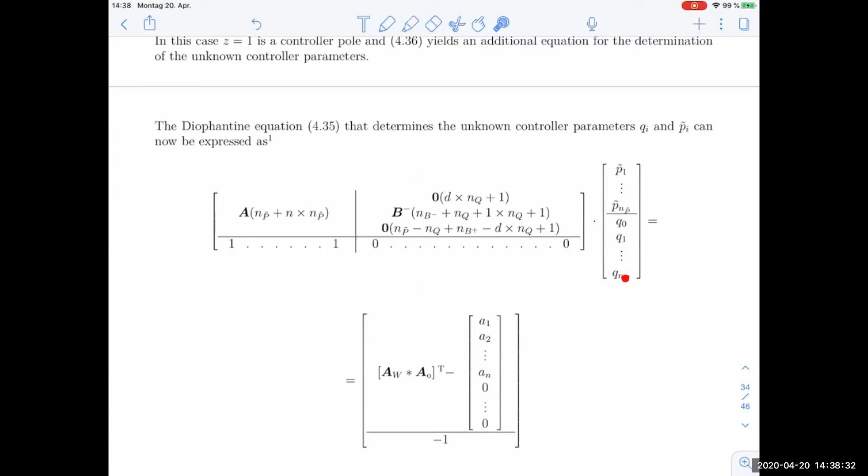And this system of equations here, the right-hand side is entirely known. That's all coefficients that we come up with directly from the model and from choosing AO and from knowing AW and BW. Then this big matrix here, A and B minus, all these entries, these diagonal entries can be built up also from model knowledge. And then we have a big matrix that we know times an unknown vector equals a right-hand side, which we also know. Written in a compact form, it looks like this.

M, some matrix, times this unknown vector equals V. That's a linear system of equations. And we potentially can solve such a system quite easily with MATLAB especially. Of course, you can do it by hand, but that's not useful here. You will do that by MATLAB, of course.

All right, but in order to do that, what we want to have is actually a unique, exact solution. And that means that essentially, if you remember linear algebra, simple case, if you have such a linear equation, then what you want for a unique solution, what you need to have is that M is a square matrix and that it has full rank or its determinant be non-zero. And then you can actually solve directly by inverting M and multiplying it with V, and you get the solution vector.

And there are tons of other methods depending on the size and structure of these coefficients, how efficiently you can do that. Gaussian elimination is a simple method, a simple systematic method that you learned on pen and paper. But of course, that's basically what MATLAB is built for in many ways, or is everyday job for MATLAB. So essentially what we need to do is to prepare the problem here by compiling this matrix M and the right-hand side vector V in such a way that it's correctly sized in a square sense and also that it's invertible, and the rest is done by MATLAB.

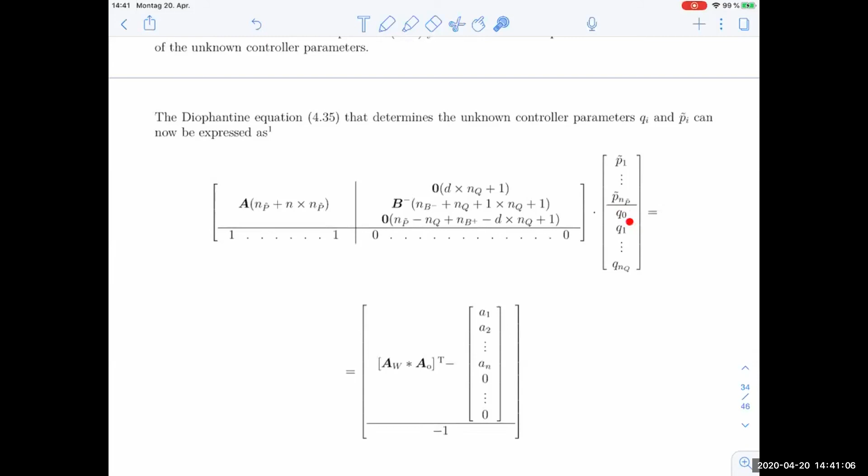Nq starts with q0 here, that's why there is a plus 1. So we have np tilde and then we have nq plus 1.

And of course, this number of rows in this vector should be the same as the number of columns in M, which is the second dimension here, np tilde plus nq plus 1. But that's the case anyways. And then also what we need is that np tilde plus n plus 1 should be the first dimension of M, the number of rows. That should be the number of rows in V here, and that can be obtained from the sizes of AW and AO. And actually that tells us about the order that we need in AO, for example.

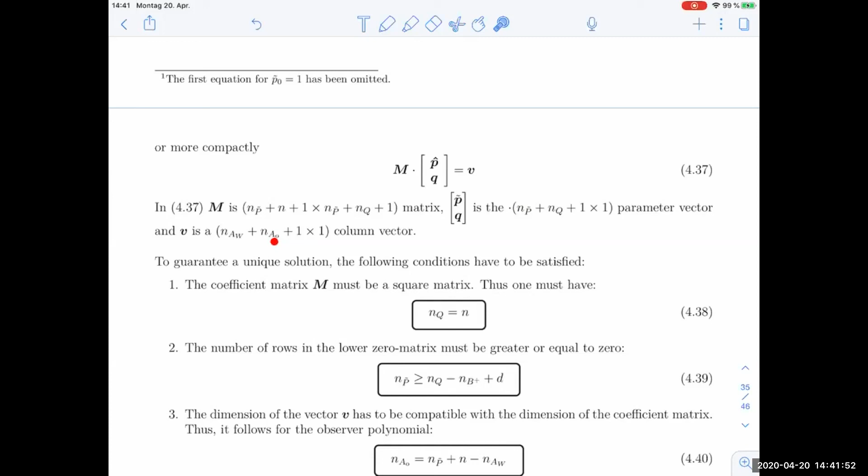Also, if you look at the structure up here, these blocks, or the row dimensions of these blocks, they must not be negative. They can be 0. If we don't have additional dead time, then this one is gone. This one could also be gone, but it cannot be negative, otherwise it doesn't work out.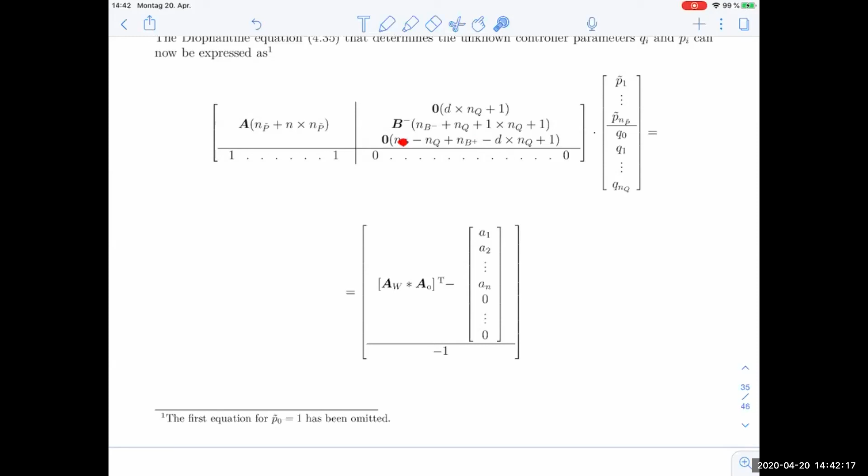So we have an inequality now that this expression here has to be greater than or equal to 0. And that's exactly this second rule, that's what we have to check. By that, we get a lower bound for the number of p tilde polynomial coefficients. So then we get from here, we get equality, that's this one here.

And also NAO should be at least 0, then we don't have an observer polynomial, or greater than 0. And to do that, we get this inequality again. So all these 4 inequalities have to be met. And from these inequalities, we'll get some hints, some rules of what order we should select for the P, for the Q, and for the F polynomials.

All right, so let's put that into some practical use.

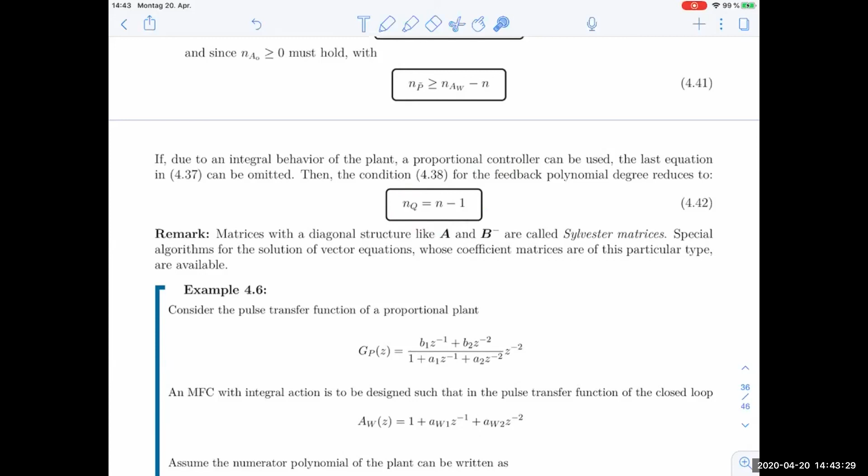Some side note: if you don't need integration in the controller, if a proportional controller is enough, for example, if you have integral behavior already in the plant, then you get a modified condition 438. This first one does not tell you that nq equals n, but that nq equals n minus 1 only.

Okay, so the structure of these matrices is called Sylvester matrices. Let's look at that in an example, 4.6 here.

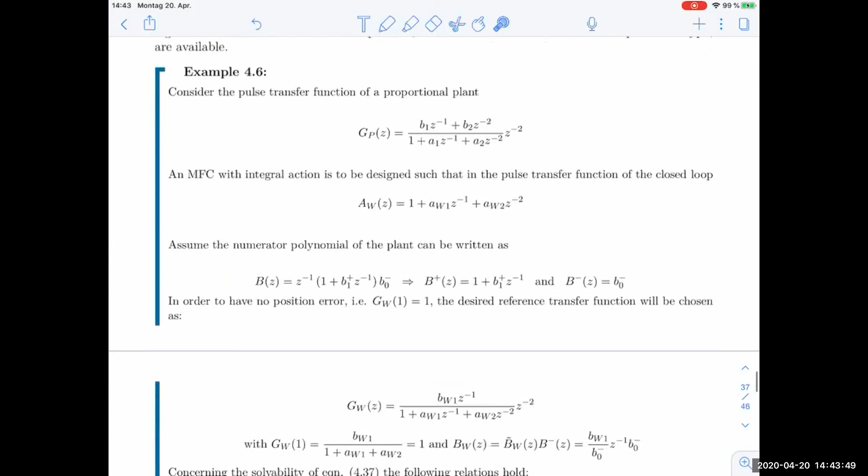We have a general structure of the plant here. So we have B, the B polynomial of second order here. We have the A polynomial here as well of second order. And we have 2 samples dead time here additionally.

So now what we want to have is a model following controller designed with integral action. So we want to have the integrator in the MFC, and we want to come up with a W with the closed loop denominator polynomial of this form, and we can consider these coefficients known. That's usual pole placement. And we also assume that the numerator polynomial here can be written as, well, z to the minus 1, of course, we pull that out.

And then we have 1, 0 here, which is inside the unit circle. And then we have another factor here. So we can identify B plus and B minus here. Take care, we always need B minus, even though it's a static number here. It's not a polynomial, or it's a trivial polynomial in Z. So there is no z to some power other than 0 here.

But since this is a monic polynomial, all the scaling, if you have some other factor, some scalar factor in B, goes into B0 minus. That just ends up here.

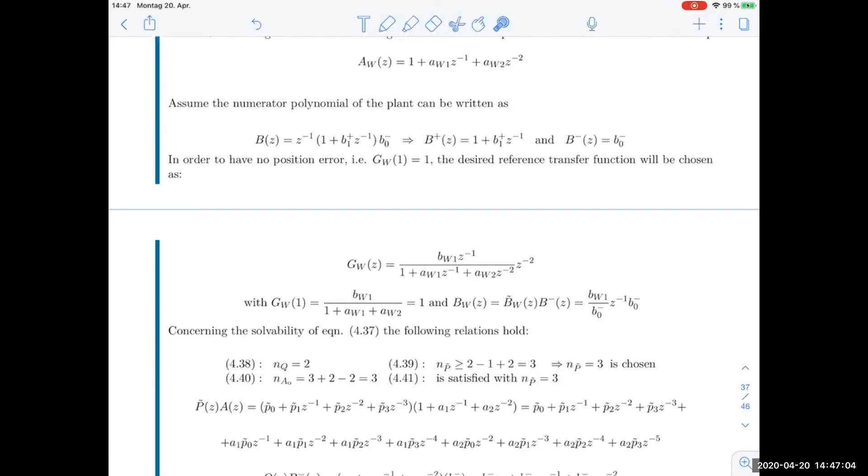Now we can also identify that BW should look like this: BW tilde times B minus. In our case, B minus is B0 minus. And BW tilde is, so we want to have this BW1 here, so we write down BW1 divided by B0 minus, times B0 minus. They cancel each other, so we established that BW is really the BW that we want.

But we can identify BW tilde as this part here, so that's what we'll use in the design.

Now we need to establish which orders of the polynomials have to be there. First we evaluate all these rules, these 4 equations, and we get NQ equals 2. Then we have NP tilde should be greater or equal to 3 when we insert, so we choose the smallest possible number, NP tilde equals 3. With that inserted, we can obtain how large the observer polynomial should be, which is 3 as well. Then we check this last inequality with NP tilde equals 3, and it's okay.

So now we know that we need a third order polynomial P tilde, a second order polynomial Q, and we have an observer polynomial of order 3 as well.

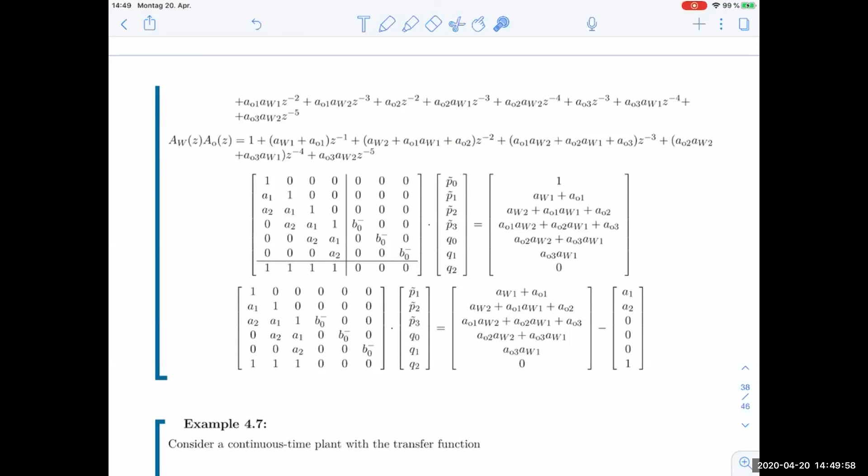This example was supposed to show you this general structure, so you can see a little bit with numbers how this construction looks like. Let's go to some actual numbers, some actual design.

We take a continuous time transfer function here with 2 real poles. We add in the zeroth order hold and sample at 0.1 seconds. Then we get the plant transfer function in the Z domain as shown.

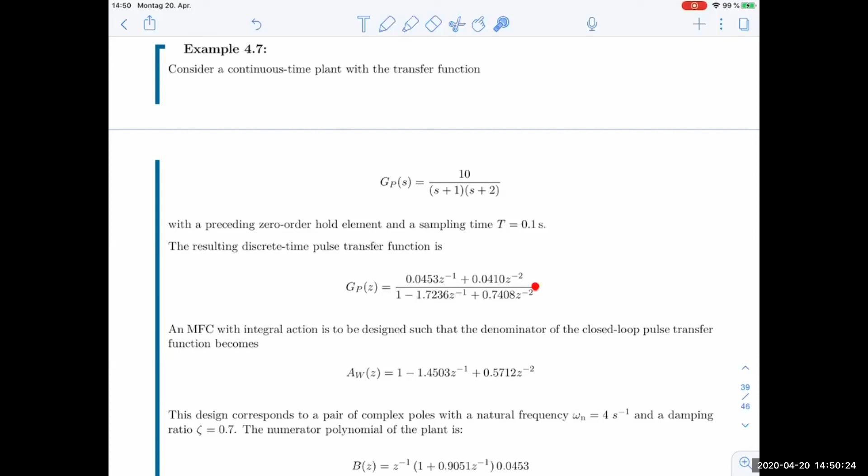We want to have an integrating MFC so that the denominator of the closed loop transfer function becomes a certain second order polynomial that can come from specifications, for example. These specifications are that you want to have a natural undamped eigenfrequency of 4 radians per second, and a damping ratio of 0.7.

Now, if you look at the numerator polynomial of the plant, you see that we do not start out directly by prescribing some BW. We first look into what BWs we can actually prescribe, so we analyze the plant numerator here. We split them up, basically extract the factor z to the -1, and put it into this form so that you get 1 plus something times negative powers of z. That could be higher order as well. Then the rest is factored, because we wrote 1 here, this factor is actually B0 minus.

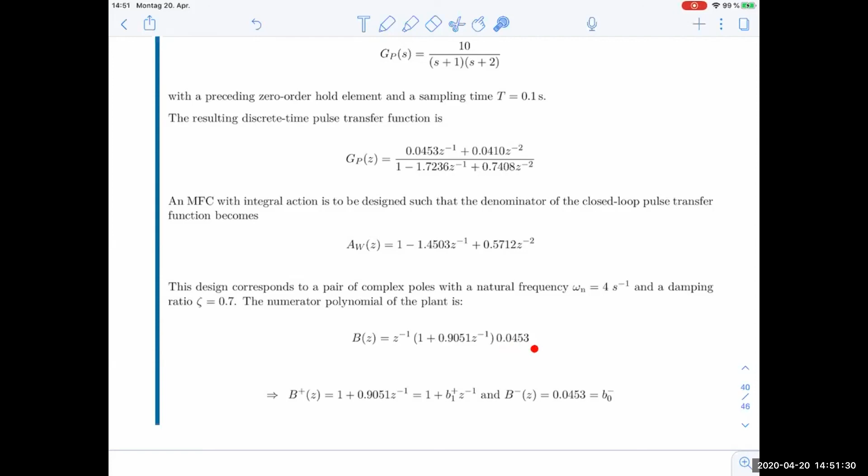To have no position error, again, we want to have GW of 1 equal 1. So we choose our closed loop transfer function like this, that we want to have. By doing that, that actually comes from the fact that when you insert z equals 1, you will get 0.12 divided by, yeah, 0.12, it will be there.

All right, so now we see that BW should look like this, and we want to have a factor of B minus in here. This factor is 0.045, so we get 1 over 0.0453 in here. So this 0.12 divided by B0 minus times z to the -1, and that's our BW tilde.

Okay, now we prepared the design. Again, we go into the conditions for solvability in order to get to our orders of the polynomials, NQ and AO. We get to NP tilde, which should be at least 1. We take that, and we manage to satisfy all the conditions like that.

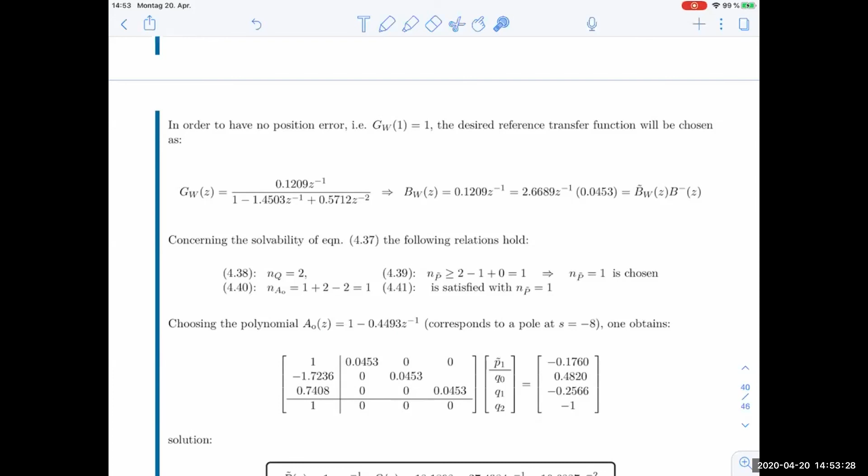Now we have a first order polynomial A0, and we can actually choose any stable pole there. We choose it fast enough, of course, in comparison to the plant transfer function. We choose some pole, it could be a different one - that's subject to tuning as well, but choose just a stable polynomial with sufficiently fast poles here. So we choose AO as a monic polynomial of the required order. Then we come up with all the equations here and solve the system of equations, and we get to these polynomials.

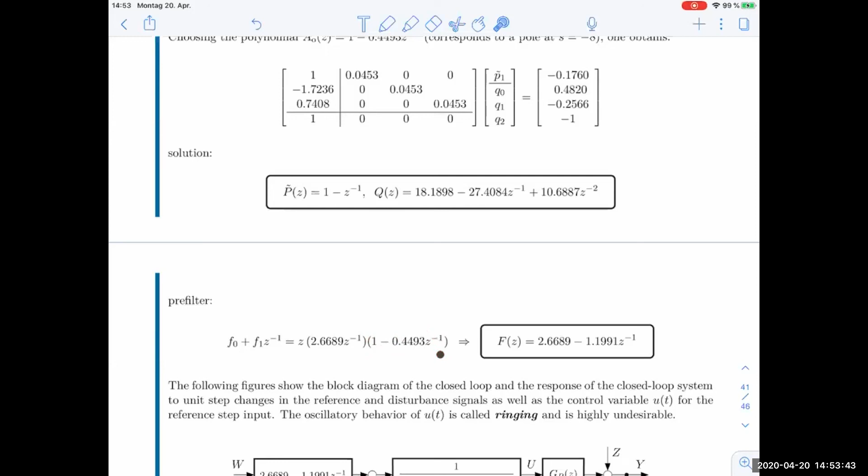And we simulate that, look what we get. At the output side, a step response looks perfectly fine. So we get diminishing response - this one is the step response for reference, and this one is the disturbance step response. This is very fine and looks good, and actually complies with the specifications that we wanted to have.

But on the other hand, if you look at U, at the control input, we see something wild going on, and we see ringing here. It's basically something more complex, somewhere in the middle, as you could say as an average value. But then about that trajectory we'll get changes of sign.

And that, as we discussed before, cannot really work well in most practical applications. The question is why that actually occurs. If you look at the transfer function from W in a closed loop, from W to U, you see that you will get a pole at minus 0.9. And if you remember our pictures of first order and second order responses earlier in the lecture, we said that poles with a negative real part, especially close to -1, produce ringing. This 0.9 is actually the decay of the ringing amplitude over time.

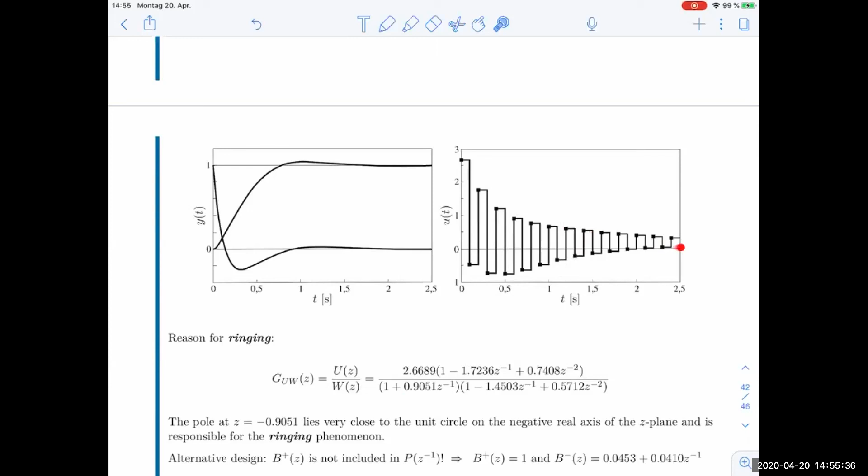So we want to avoid that, obviously. And the key to success here lies in our choice of B+. We do an alternative design, for example, by not taking this pole into B+. That pole was actually included in B+. If you look up there, B+ was this here in the middle, this one. And that's exactly the pole location of the ringing behavior that remains.

So now we take care not to put poles, or zero locations that may produce ringing, just as we avoid putting in unstable behavior, or all-pass behavior in that sense. If you have zeros outside the unit circle, you will not put them in B+. And you do the same basically with zeros that are close to ringing, close to -1. By doing the design once again with B+ only equal to 1, and B- carrying all the rest, that now contains the ringing pole.

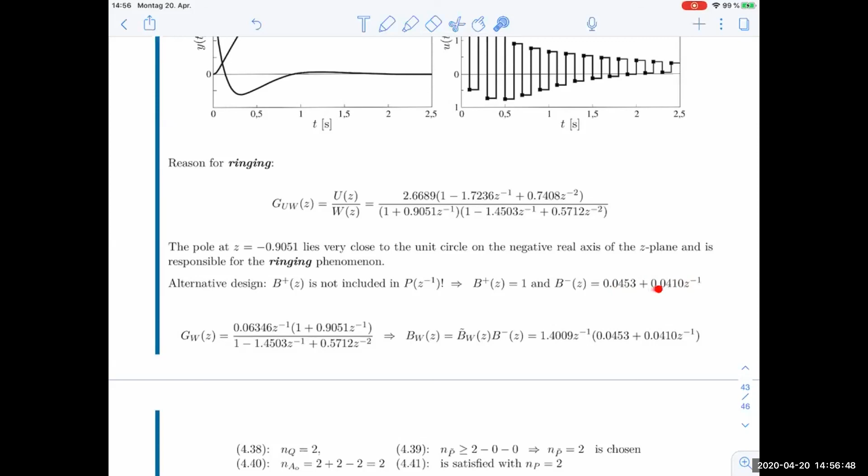We go through the design again and get a little bit different conditions here. So we have to choose, for example, a second order observer polynomial here. So the design gets a bit more complicated. The controller is a bit more complex in that sense, has more dynamics. We choose it here as poles at -8 and -10, and put them into the Z domain, and that produces our observer polynomial.

That's only internal dynamics, which will not be visible to outside. We just should choose stable and sufficiently fast poles here. Now we do the design, and the polynomials look a bit different, the order is a bit different, and what we get is virtually the same responses for the outside world, for the reference step response and for the disturbance response. And if we look at U, now everything is nice, everything is smooth, and actually as we would like to have it usually.

And this ringing behavior is just gone. So it was just an unfortunate constellation before, where we produced ringing inside, which was cancelled again. So it was not visible to the outside signals, but in the internal signals it actually came up, and that's dangerous in an application.